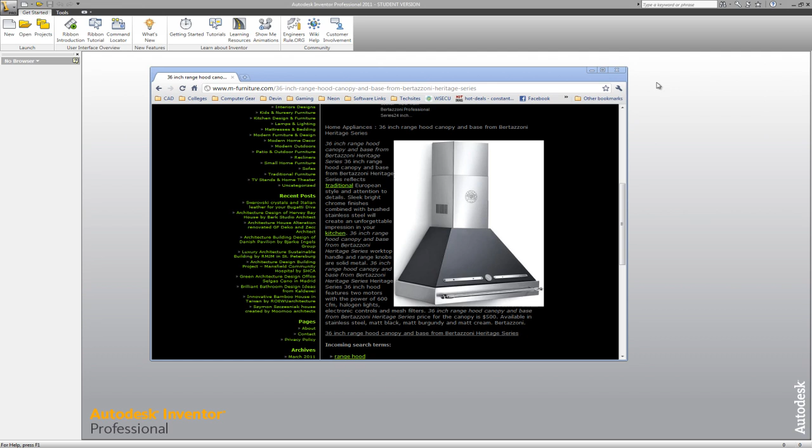I'm just going to wing it, but I'm going to go through all the steps, and I want you to follow along. If you choose to create one of your own style and dimension, it doesn't have to look exactly like mine at all. It can be your own design. I'll give you extra credit for it.

So I'm going to go to New, to English, to Sheet Metal, and OK. And then we are in our standard sketch mode right here.

First thing I'm going to do is go up to the tab for sheet metal. Our very first thing we do is we want to set our defaults. So I'm going to go here to the edit icon and click that open, and the very first thing is go New.

I am going to go 12 gauge stainless steel, and OK, and I'm going to double click on that to make sure that that's my default.

Now that becomes my default, and I'm going to scroll down and find stainless steel. There's some stainless steel 440C down here. I'm going to leave my thickness at 0.120, which is 12 gauge.

I believe I'm going to go up to bend while I'm right here without having to come back and do this. I'm going to go to bend, into bend relief, and I'm going to go to round. Click on sheet again, go over to K factor here, and click on the edit.

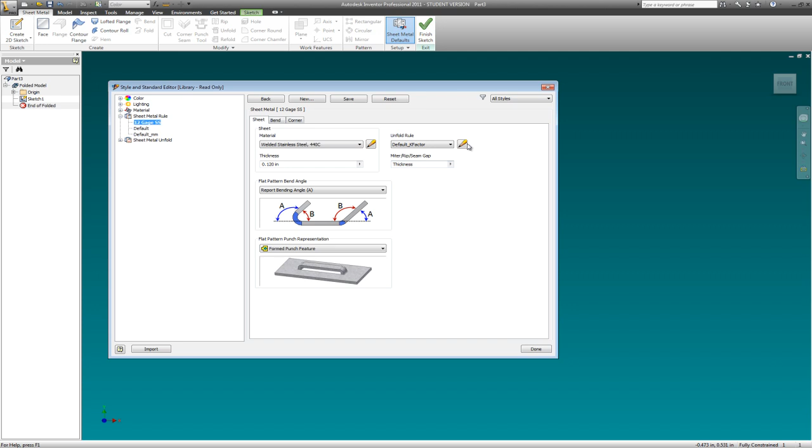It says, do you want to save the edits to the 12 gauge stainless steel? And I'm going to go yes.

I'm going to go to new, and I'm going to go V-bend gauge. I'll make it — I know I'm spelling gauge wrong, but I like spelling it this way — gauge stainless steel, with capital S's for stainless steel. OK, and go OK. Again, I'm going to double click on that to make sure that's the one I'm changing, and I'm just going to leave everything here as is, and then go to done.

So we look at this. Our sheet metal rule says that we've got stainless steel, 12 gauge stainless steel. Down here we have V-bend stainless steel, and off we go.

I'm going to use the thickness from the rule right there — actually, I'm going to uncheck the 'use thickness from rule' box, so that we're using the thickness of 120. And I'm going to apply. And we should be good.

So we are now ready to do some drawing. I'm in my front view. I hate this view, so first thing I'm going to do is it says finish sketch, okay, and then I'm going to right click and edit sketch, and there we are — we now have our sketch toolbar.

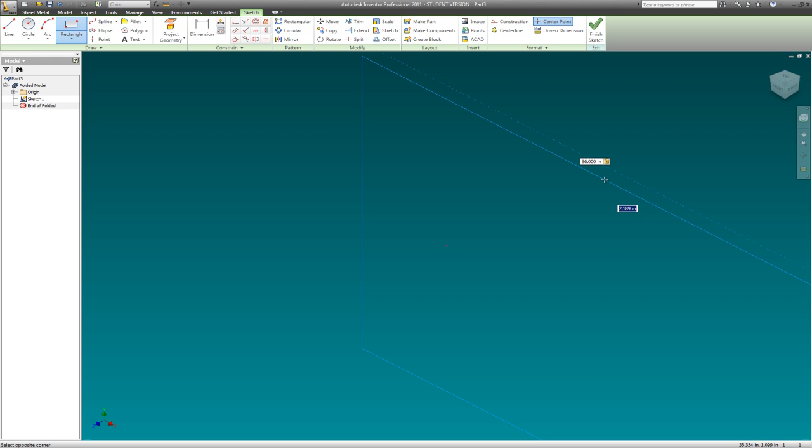I'm going to grab the rectangle over here, and I'm going to go 36 by 24, and there we have a rectangle that's 36 by 24.

I'm going to go to the front, and then pick this arrow so I make it nice and flat. I'm now going to go up to my house, right click, and go set as front. I'm going to go up to the upper right hand corner of the view cube, back to my house, right click and set current view as fit to view. So that's my home view from now on, and when I go to top, that's what I'm working in.

I think this is, for me, a holdover from working in AutoCAD and 3D, because that's where the homes are in AutoCAD, and for some reason they changed it over here. I just don't have my template set up right — I'm not quite sure what's working. But this is going to be real quick.

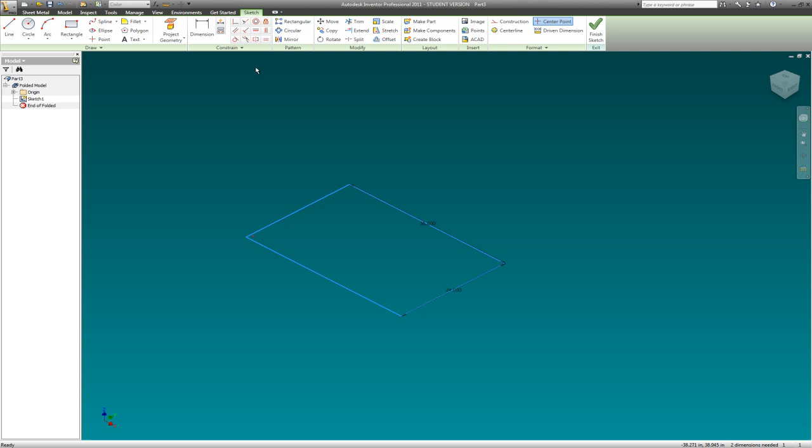So here we go. First thing we're going to do is go up to chamfer. I'm going to put in 8 inches, and I'm going to come over here and chamfer these two front edges just like that, and go OK.

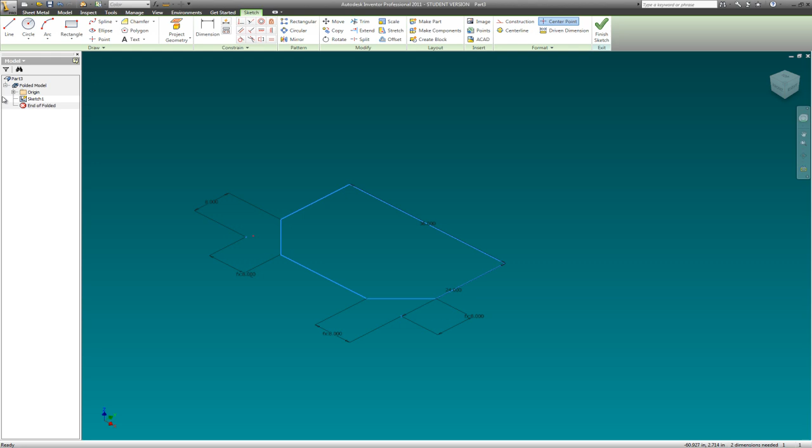I'm going to go over here to my origin and hit the plus sign on the origin and find the plane, which happens to be the XY plane that I'm working in. I'm going to right click that plane, go to Visible, and turn on the plane. Then I'm going to go Finish Sketch.

Now in Work Features, I'm going to go to Plane, pick the existing plane, and then pick again with my left button and pull up. You can see there's a number there, and I'm going to go up 18. I'll hit the green check mark, and now I have a new plane there.

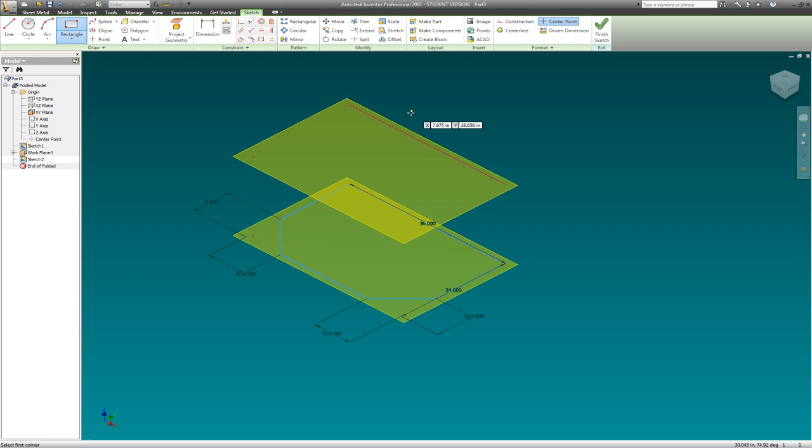I'm going to right click, New Sketch, and pick this plane to sketch on. Now I'll do my project geometry and drop a piece of geometry across the back here. Then go up to rectangle, attach it to that piece of geometry I projected, come over here, and go 18 tab 12. There we go, so I got a little 18 by 12 rectangle on top of my rectangle with the chamfered corners.

Then I'm going to center it. I happen to know that if I go to the end of this and make it 9, we should be centered, but I'll be a good guy and double check. I'll go right above View up here to my Measure Distance tool, pick the endpoint, and confirm that it is 9 and that I am centered.

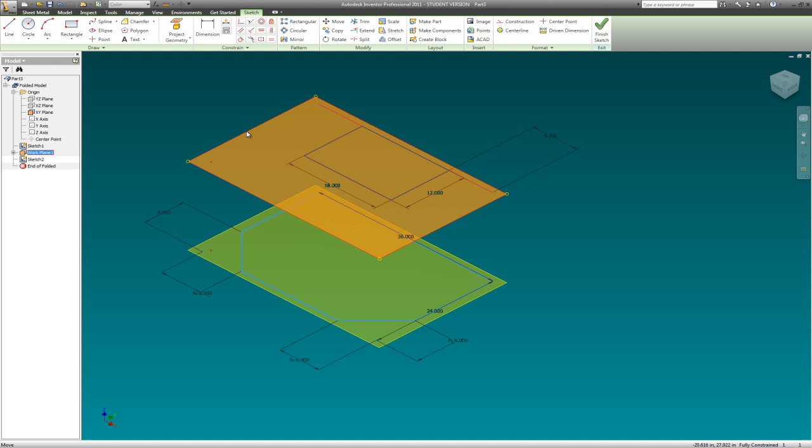I'm going to go to the work planes and turn their visibility off since it'll just be in the way and I don't need it right now. I'll need it a little later, but this is good. To show you, if I go into my orbit, you can see I have two pieces of geometry on two separate planes. Get back into Home.

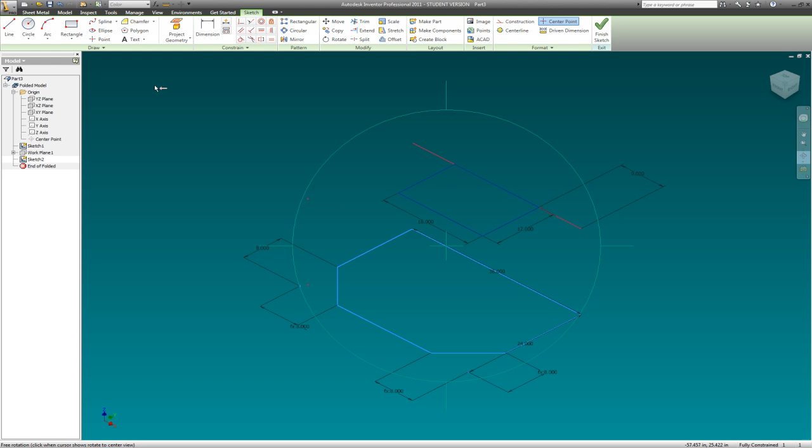Now I'm going to go Finish Sketch. We're in our sheet metal ribbon right now, so we're going to go to Lofted Flange. I'm going to pick this, and pick this, and we have just created our first lofted piece of sheet metal. I'm going to go OK.

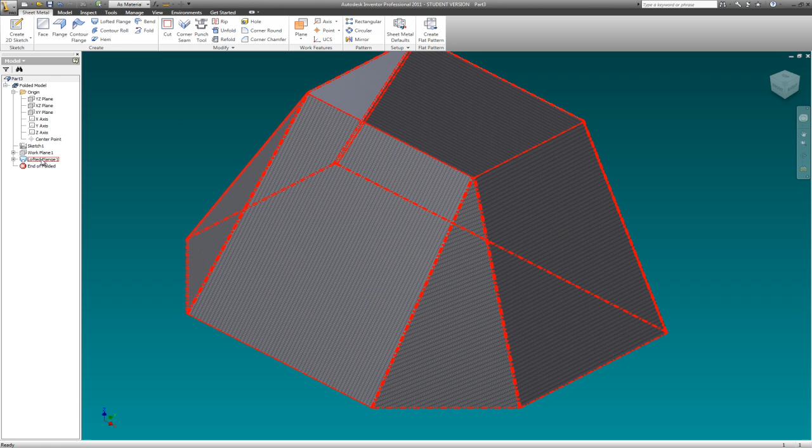And there we go. Oh, look at the nice texture with the little weld marks on the stainless steel. That's pretty spiffy. Okay, now one of the things in Lofted, I'm going to go back into my browser and right click on the Lofted feature and edit it.

One of the things we want to check is this converge box. Look what happens to the corners here. I'm going to uncheck that, then zoom in here so you can see it really well. When I click that converge box, look what happens: where the material would converge in the corners, it automatically cuts it out for us. That's an important thing for you to make sure and turn on. I'm going to go OK, and there we go.

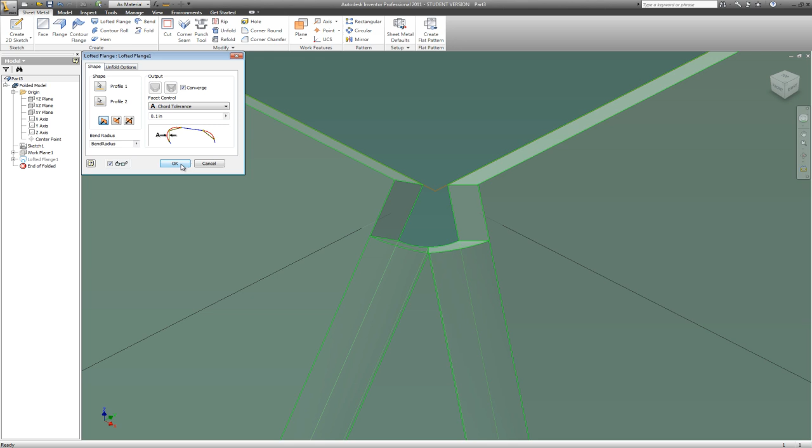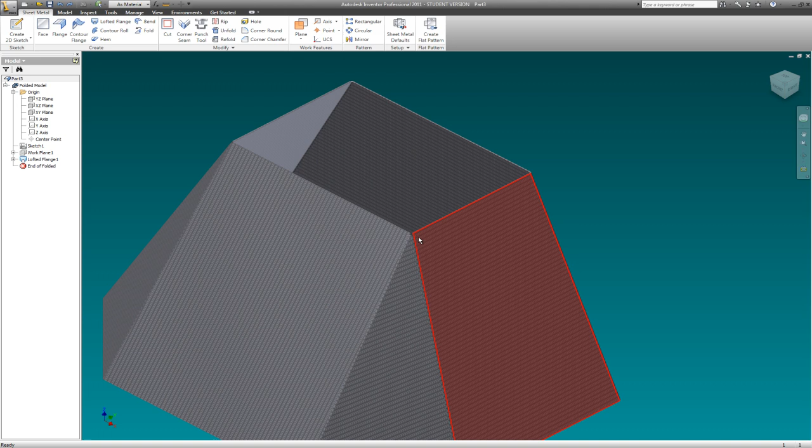Then, you know what, one of the things I'm going to do—I'm having misgivings right now, so I'm going to pause this for a second. I'm having some misgivings about this material. It's pretty cool looking with the welds, but I think it's going to be too busy for you to see some of the detail. So I'm going to go back up to sheet metal defaults.

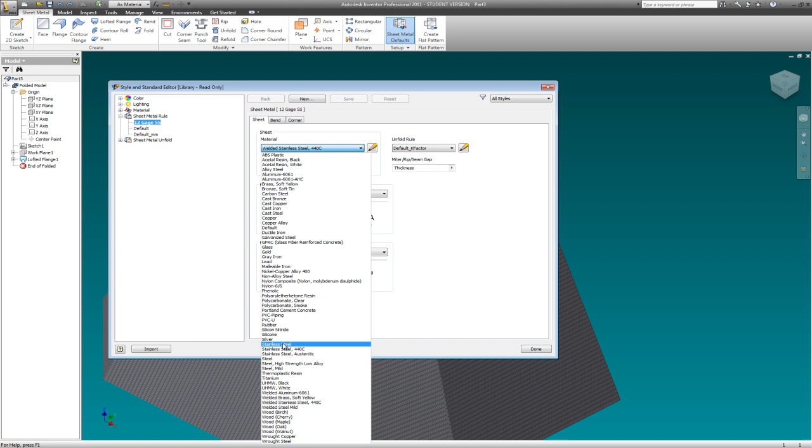I'm going to go back into the edit sheet metal rule and click on that. Where it says in the drop down materials menu, I'm just going to scroll down and find stainless steel, okay, without the welded look. I went too far when I was scrolling down, and I'm just going to pick the stainless steel 440C, okay, and then done, and save my edits, yes.

And I think that's a little easier for you to see the detail on. The welded stuff was pretty snazzy looking, but I think it's just going to be too much for us to deal with.

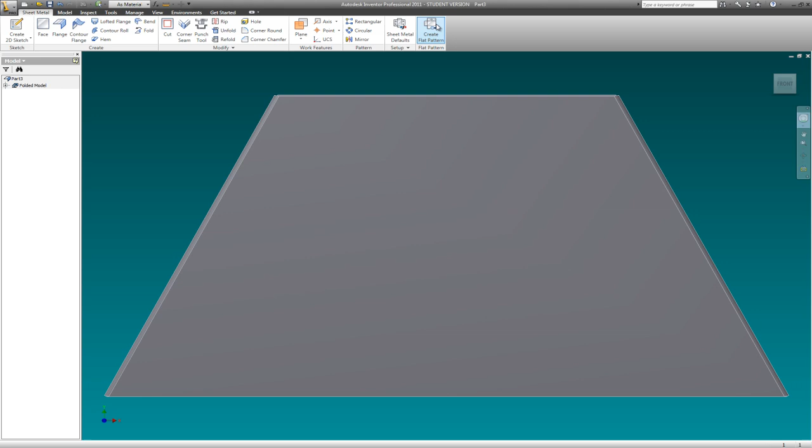Okay, so one of the things we do know about sheet metal is we want to be able to fold this out, and I don't believe we can right now. Nope, it's not going to do anything for us. So I'm going to go back into my home, but it did turn it around for me, which is kind of nice.

So what I'm going to do now is escape a couple times, right click, and we've got our flat pattern here. We've got to open this up. And what I want to do now is I'm going to have to undo here.

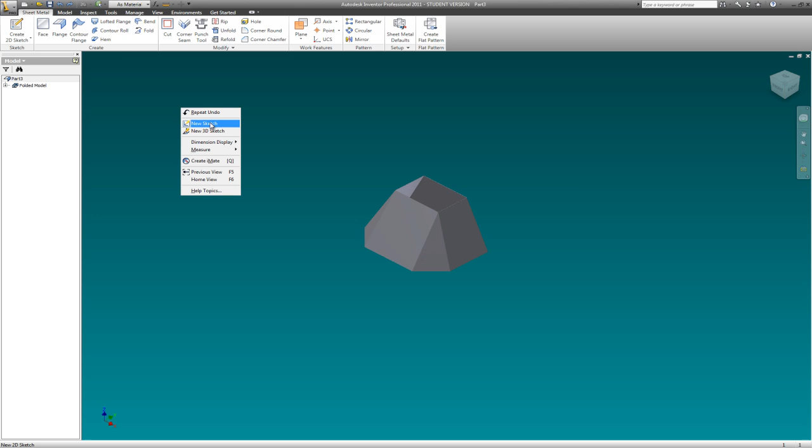There we go. Now I'm going to right click and go New Sketch, creating a new sketch on the back plane.

I'm going to go up here to my construction line first. Highlight that, come pick a line, find the midpoint on this piece of geometry here, then come down and find the midpoint down here.

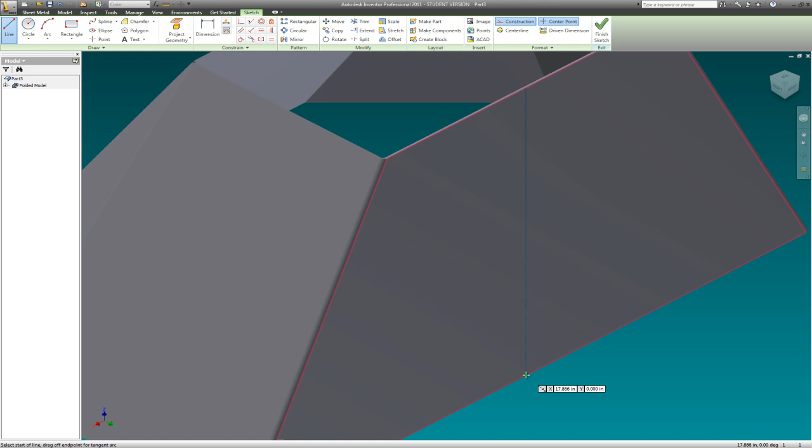Let's zoom in a little bit. There it is, okay, there it is. So now we have that midpoint right there.

I'm going to go finish sketch, and then we're going to go over here to a new tool called rip, and we're going to rip this thing. So I'm going to pick the face.

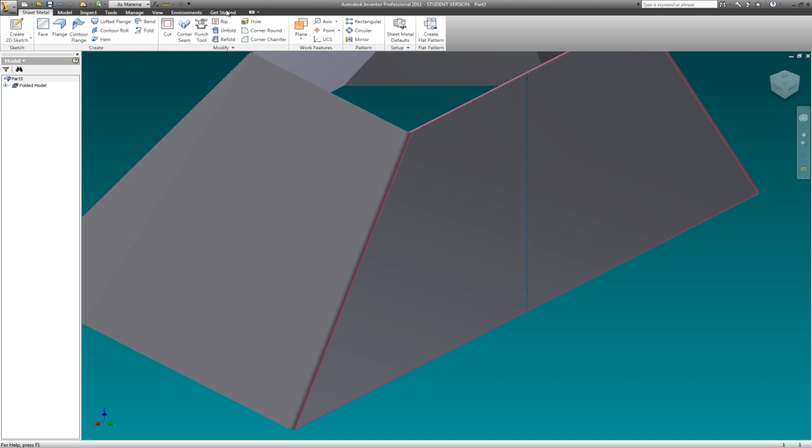Then I'm going to come over here, pick the rip point, come back over here and pick my line. Okay, rip, pick, and rip point. I don't know what's going on here, so...

We're going to go rip again. Rip, pick the plane, and then notice you just have to come up and pick the point right here of the line that you created. You don't have to pick one. If you go up here, there's a 2-point option, a point-to-point option, that's if you wanted to do something diagonally.

I'll actually show you that here. Let's go point to point. So I'm going to come over here and pick that point right there, and I'm going to pick this point up here, and there's my rip line diagonally.

I set my gap, I'm going to set it for 0.25, and I'm going to go apply, and you can see if I swing around here that I was able to rip it on an angle.

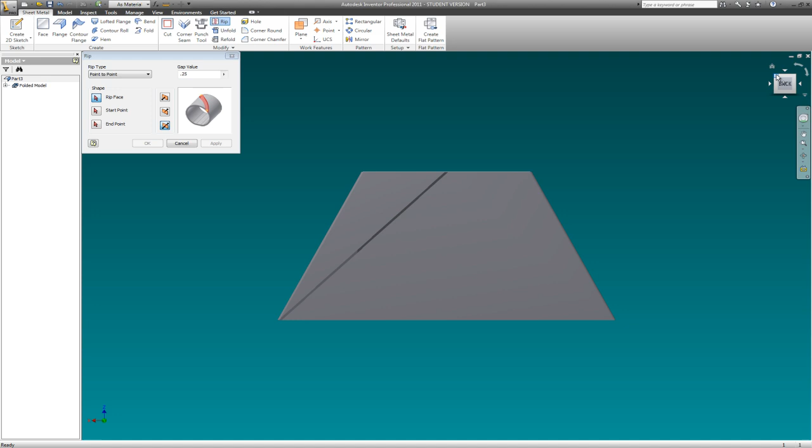But I don't want to do that, so I'm just going to go back here and undo my rip, close this out, open up my browser, go to my rip, right click on it, and go edit feature.

I'm going to go to single point, and then since I got my face, I'm going to come over here and pick my face, which is that, and then my rip point, I'm going to pick this rip point right straight up here, and notice it went straight down. I kept my value gap of a 1/4 inch, and I'm going to go OK.

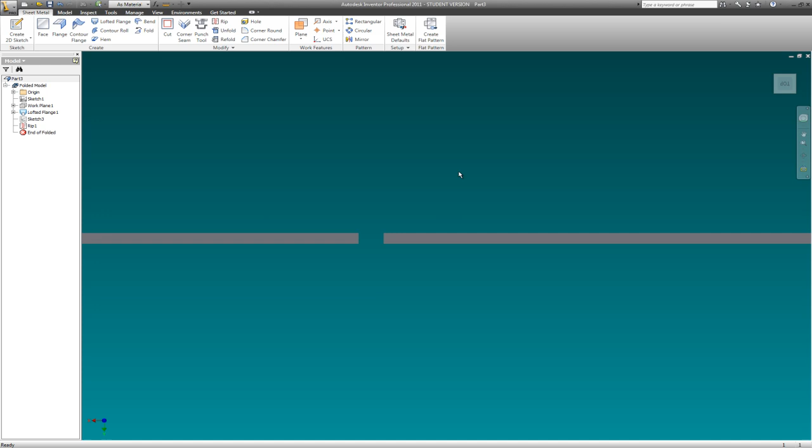If we look on top, you can see there is a gap right there of a 1/4 inch between my two panels. Now go back to home, come back around here, and then we're going to start a new tool.

We're going to use the flange tool. I'm going to pick the flange tool and come over here and pick this edge. Notice it highlights that it's 1 inch, okay, and it's 90 degrees.

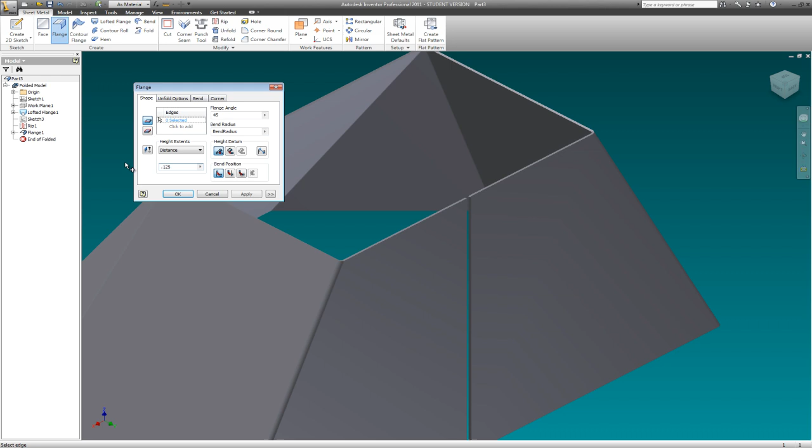Well, first of all, I'm going to make this 45, and then I'm going to make this about 0.125. Let's see how that looks. And I'm going to come on top and look on it.

This is one of the things you want to do while you have this available, is you want to keep working at it. So I'm going to go to my flange right here and close this. I'm going to right click on my flange and go to edit feature, and notice how it highlights it. So now I can change things.

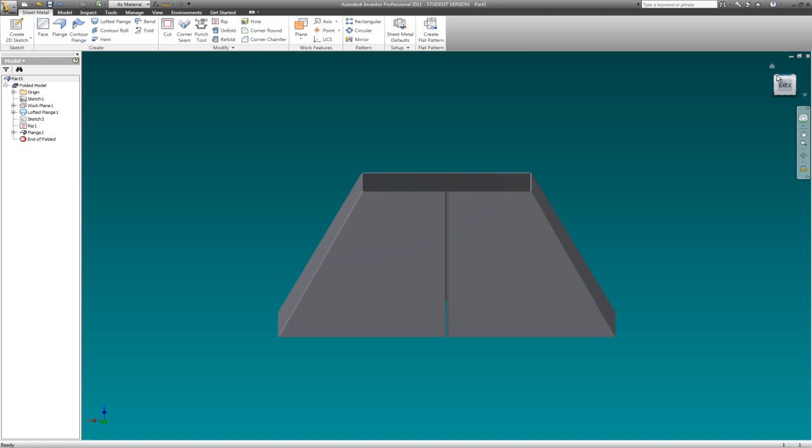I can go 0.25 and it made it longer, and that's what I wanted to do. I wanted to just make it a little bit longer, and you can use that function to edit and check things out.

So then I'm going to come around here again. I'm going to use the same flange tool, and I'm going to pick this edge right here, and you can pick either one, it doesn't matter. I'm going to go on top, and again this way it allows me to see what I'm doing.

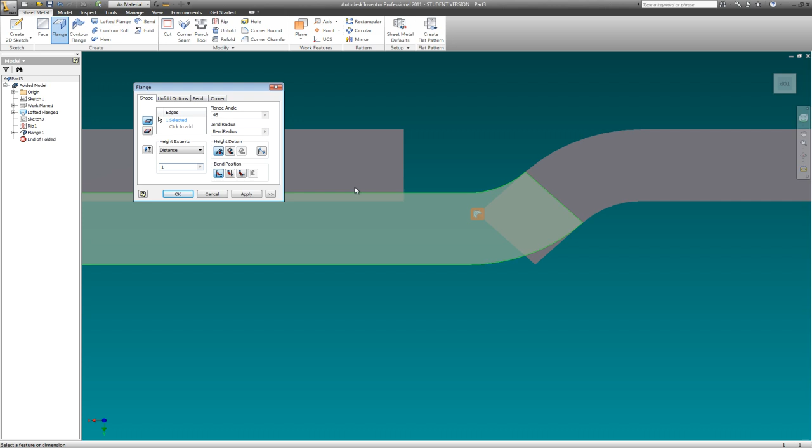Now I can tell you immediately that I'm going to make this 1 inch long, and I'm going to get a collision in here. It's going to tell me that I have a collision. I'm going to go apply, and there it is.

But I'm going to accept it because I have the opportunity to go back and fix the first one. So I'm just going to go to the first flange and go to edit feature, and I'm going to increase my distance to 0.3 and see how that's too much.

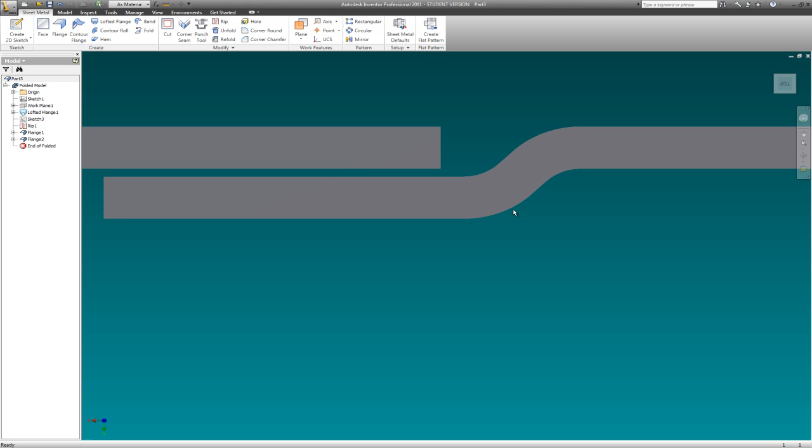Okay, so I'm going to go into the first one and edit my feature, and let's go 0.25 and see how that looks. That's pretty darn good. That is a standard offset of 0.25, so I think I'm going to leave that right there.

That was done by flange and flange. You can go into the first flange, edit the feature, and you can see that I did 45 degrees at a distance of 0.25. Then I went into the second flange and I'm going to edit that feature so you can see it. I again did 45, but I made it go the other way, and I went a distance of 1 inch. I'm going to go OK.

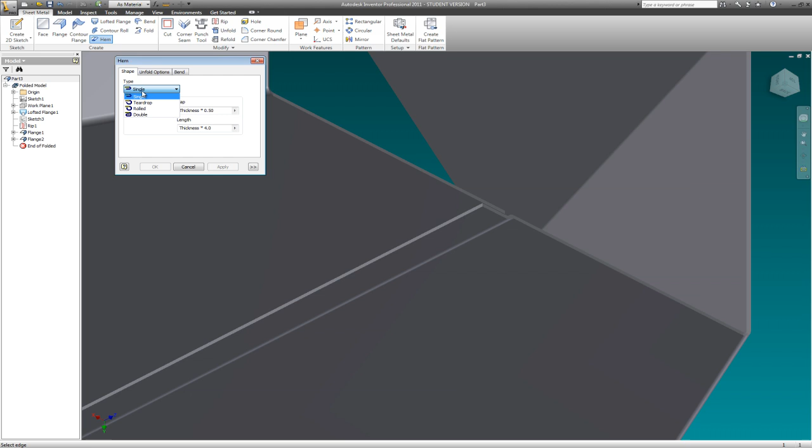Now I'm going to go into hem, and there's several different kinds of hems. There's a single, a teardrop, a rolled, and a double. In this case, I'm just going to use a single, and I'm going to come over here and put it on this corner here, and I'm going to come back. As you can see, I'm on the wrong one, excuse me.

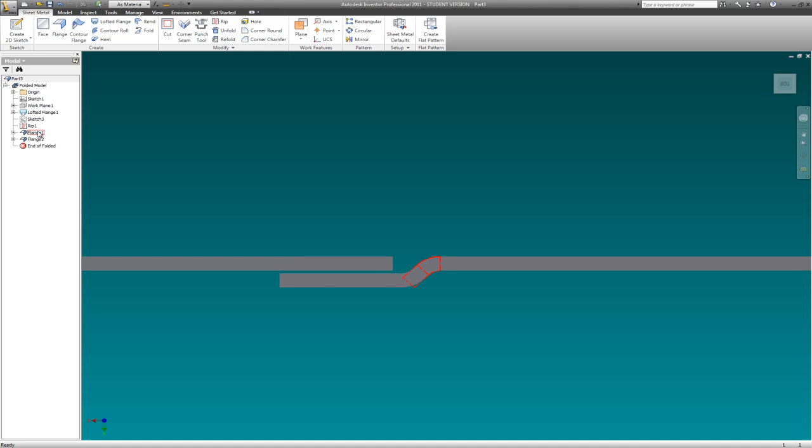I just need to go back into here, and I know I need to change something because I go to this very first one of my flanges, and I'm going to go to edit feature, and I'm going to go 0.375, and let's see how that looks.

I'm going to take my measure tool, and I'm going to go from this here to that face there, and that's 0.11, and that's not enough. I need at least 0.125.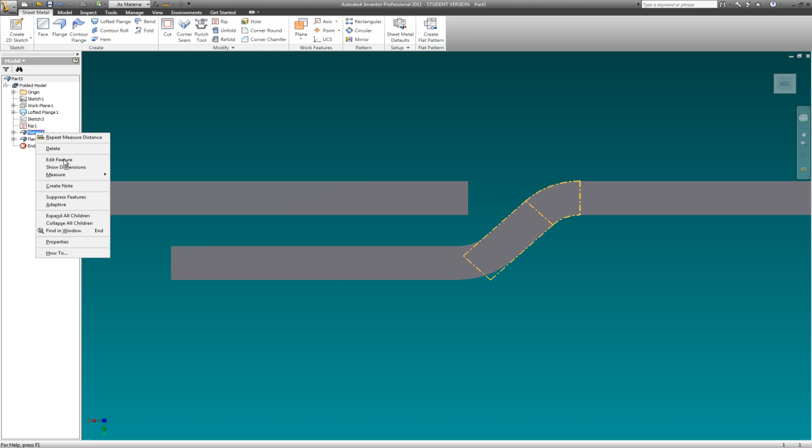So because I'm going to flange, I'm going to bring around this hem and bring this back around. I'm going to go in here, and this is - if you did this all the time, you would have these things figured out in a heartbeat. It wouldn't be an issue at all. But this is a great opportunity for you to play.

So I'm going to go 0.4. Let's see how that looks, and go OK. And I'm just sort of guessing as I go, and I just need it to be more distance in between here than the thickness of the material.

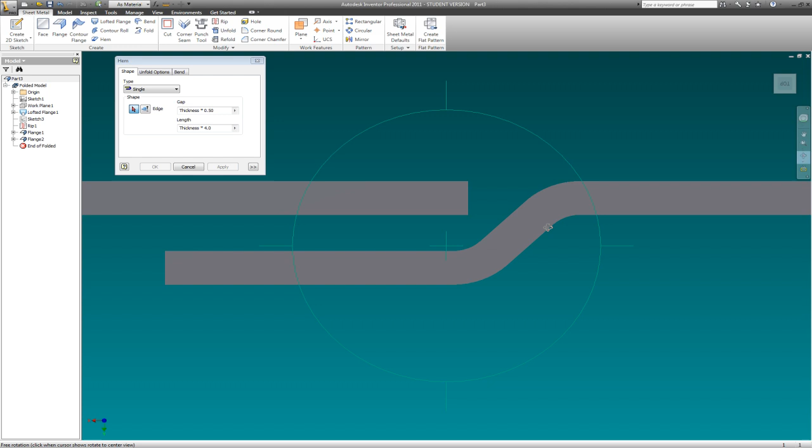Okay, now I'm going to go to my hem, and I'm going to come put it on this edge. Let's see if I can get my orbit to go just a little bit. There you go, just a little bit so I can grab that edge. Okay, escape, and come in here and pick that. And then let's go back on top and see how I'm doing here.

Oh, that's going to work. That's going to work. And I see I need to do a little more. So I've got a distance in here, I got a thickness, and I have a distance. So let's see which one wants to.

Let's go here, let's try 8 on this. That's my length. Okay, so that's going to be okay, I think. And let's go with my thickness here, and I'm going to go to 1 and see how that works. I like that. I'm going to go actually 1.1.

I'm going to take that and go OK, and we're going to get a conflict again. So just be prepared. Great, and I'm going to accept it because it's telling us we have conflicts, but it allows us to work them out. And I'm going to close this out.

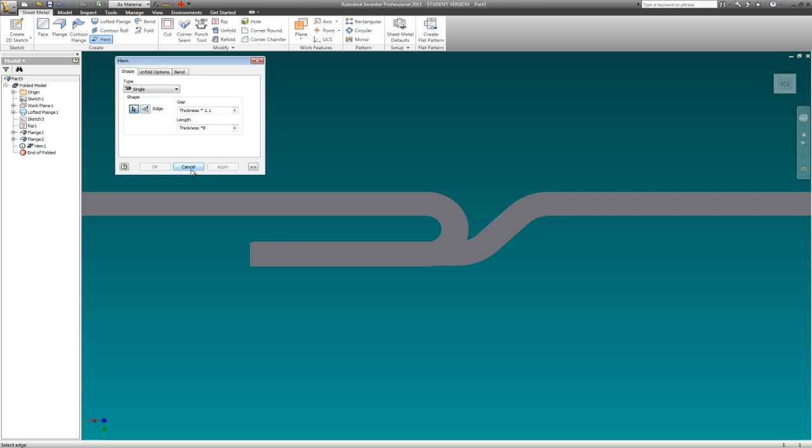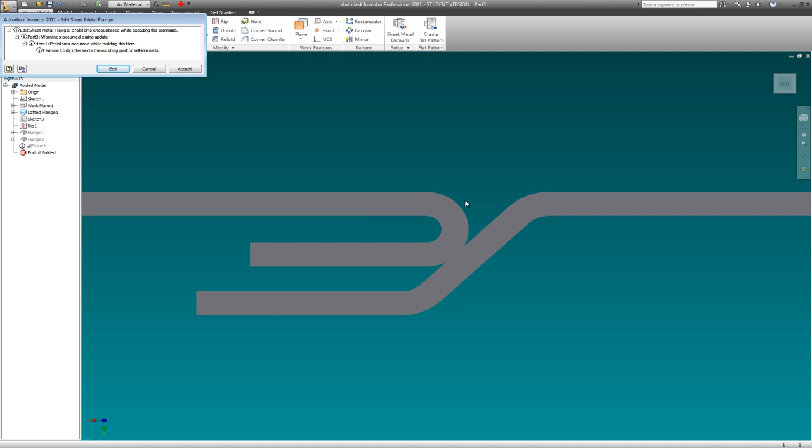Then I'm going to go back into my first flange, and I'm going to go in here and edit feature. And looks like I need to go maybe, let's try 0.75. I'm just guessing here, you guys. Okay, and that's too much, okay? And also I'm seeing that my gap in my rip is not going to be enough.

So I'm going to cancel that. I'm going to go back to my rip, and I'm going to edit the feature, and I'm going to change my gap to 0.375. And I'm going to accept that.

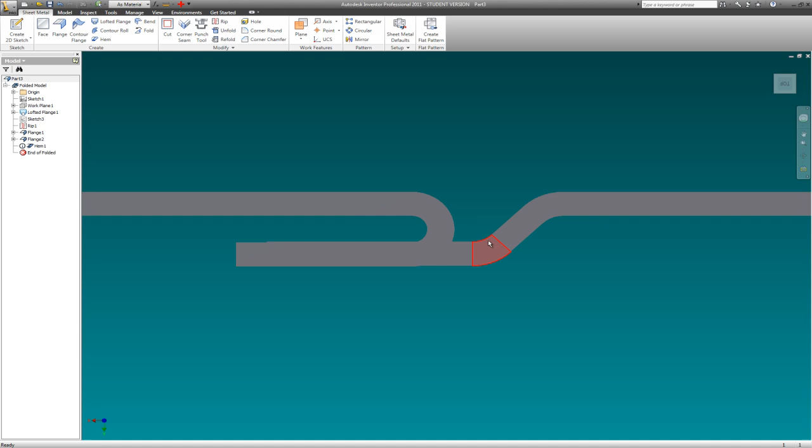Now I got to move this out, so that was that first flange, and I'm going to edit flange, and my distance is 0.8. Let's see how that looks. Too much. First flange, and...

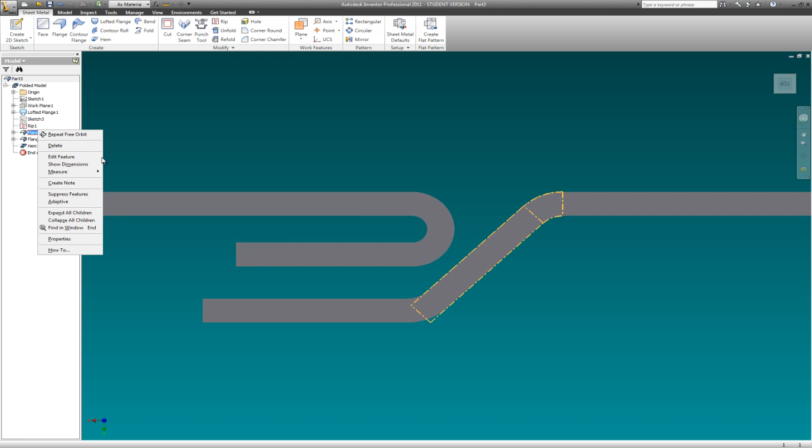Edit feature, and how about 0.6? Oh, there we go. Now we're cooking with gas. I like that, okay, that looks really good. That looks great. That's exactly what I'm looking for.

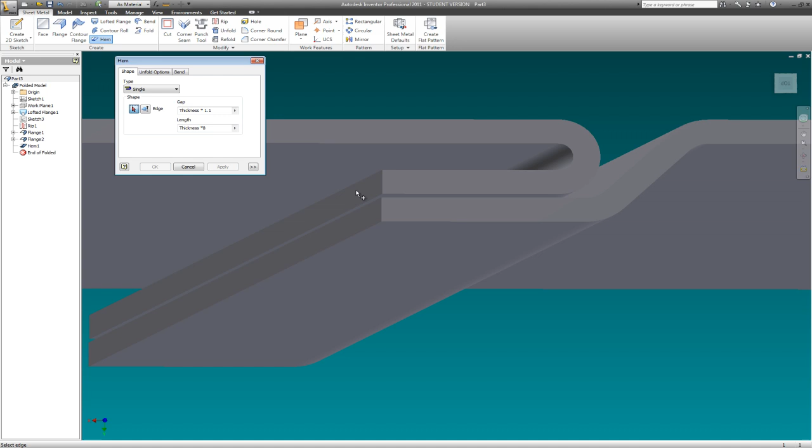Then we're going to go ahead here. I'm going to roll my view just a little bit because I need to put another hem on this. And put the hem right here. Okay, and I'm going to go back on top so that I can edit it and make it look right.

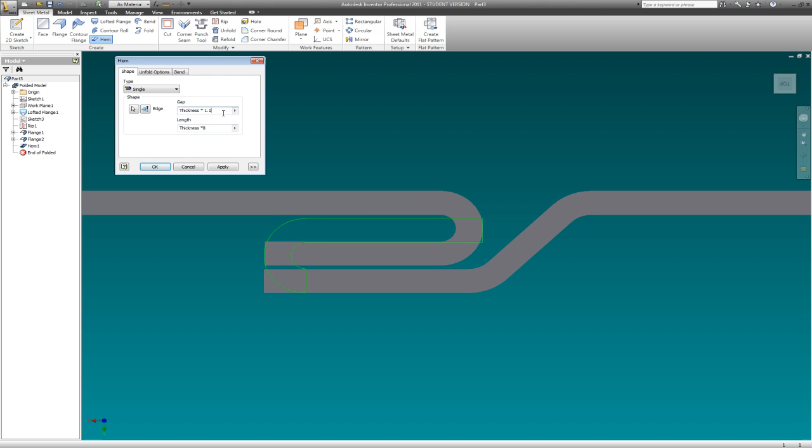What I'm seeing then is the thickness is - I need a little bit more thickness, so I'm going to go to 2. There we go, so that is clearing both sides of that. Okay, and it's a little bit too long.

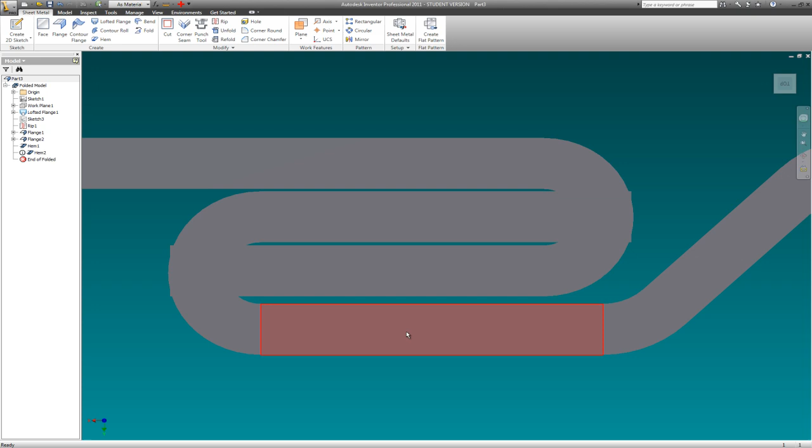So what I'm going to do is apply, and it's going to tell me I have a conflict. I'm going to accept it, and go back into this flange here, which is our second flange that we did. I'm going to edit the feature and increase the length to 1.25, and go OK. Great.

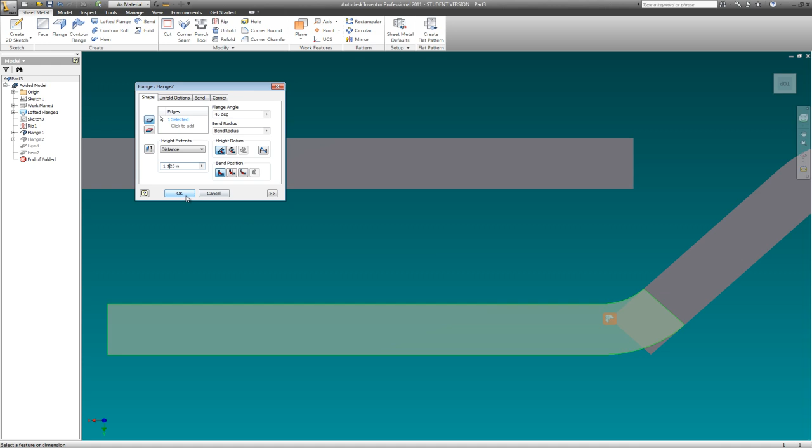I could probably change that to edit feature. Well, let's try 1.125, so 1 1/8. Yep, got a little bit of conflict. So I'm going to cancel that and keep the one that we had, because it's better to have a little extra than to make this all too tight.

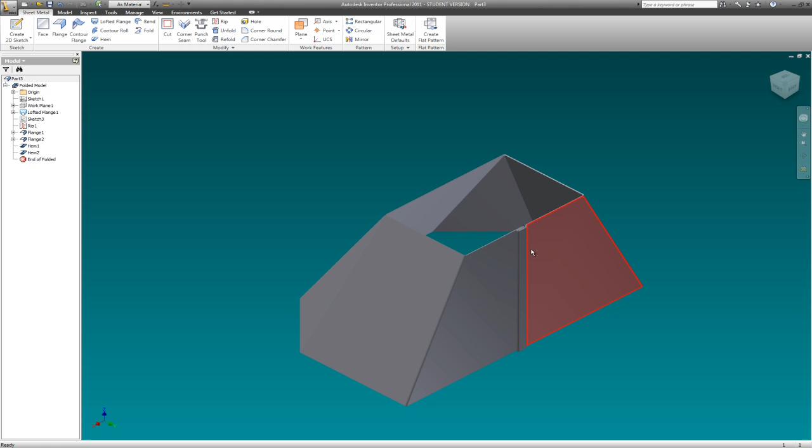But that all looks really good, and I do not have any conflicts. So now I have my object, and we are ready to do our magic unfolding. So there's our seam that you would create, and that would lock these two together. And I'm going to go create flat pattern, and there it is.

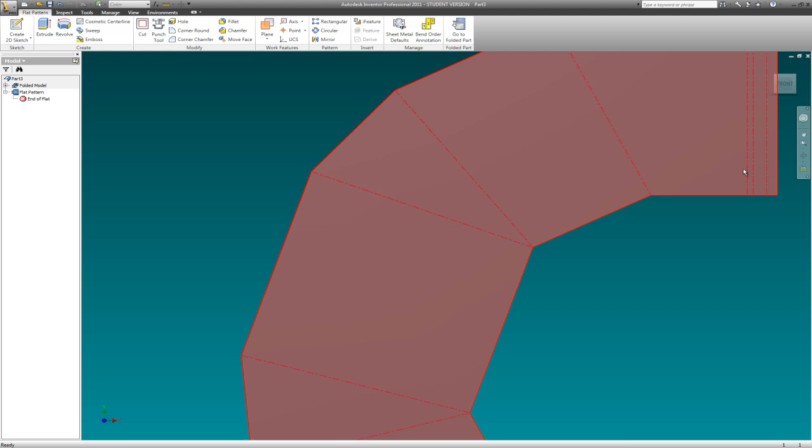And you can see all the little points that you would have marked out on your sheet metal. And I believe there's some corners that are actually, it's not showing them cut out when they're here, but it will a bit later. There we go. So that's the first part of this.

Now let's go down and work on this a little bit more on the inside here. So the first thing I'm going to do is come down here, and I want to do another hem on the front, because I want to strengthen this along here, and also make it so it wouldn't cut you if you raised up and hit it with your head. So I'm going to go up here, and I'm going to go to the double.

And I'm going to roll it onto here. I'm going to zoom in here and pick this inside corner. There we go, and we can see what it looks like. And I can change my thickness back to 0.1, I think. Let's take a look.

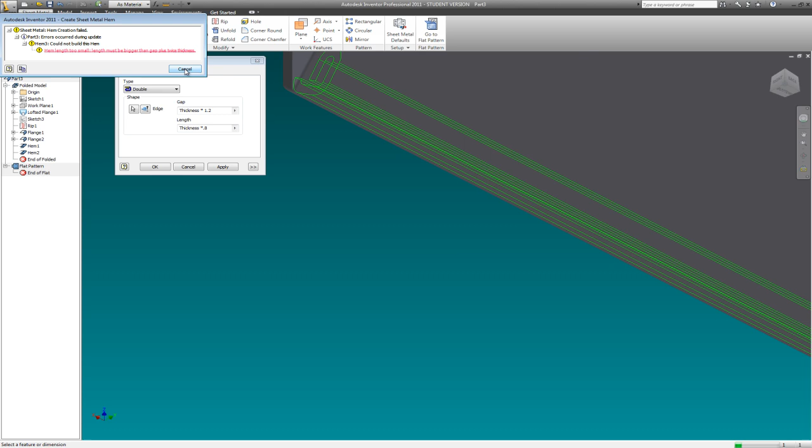And actually, I like the thickness. I like that. Let's go to 1. Apply. Oop, what did I do? Can't do that. Cancel. Okay, so let's go to, I think it was 0.8, wasn't it? Apply. Too small. Okay, I think it's just 8.

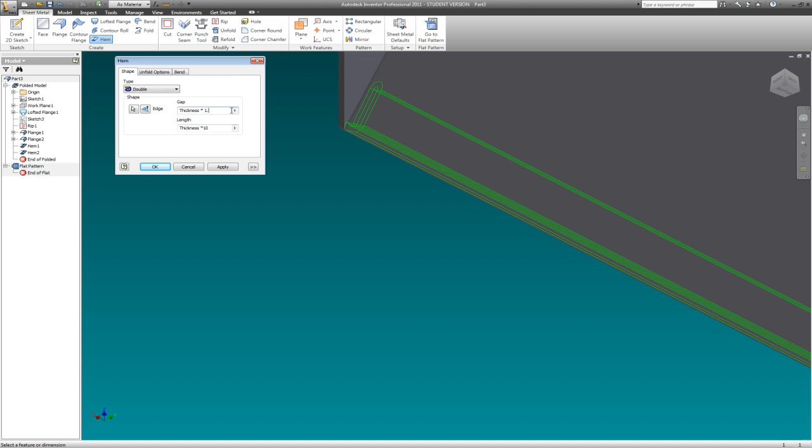There it is. And let's go to 10, which I believe looks pretty good. That looks good. And I'm going to go up, and my thickness, I can make this a little bit smaller. Okay. Apply. There you go. So it's a real tight bend that you see. Boom, boom. Okay. I don't think I can go any smaller.

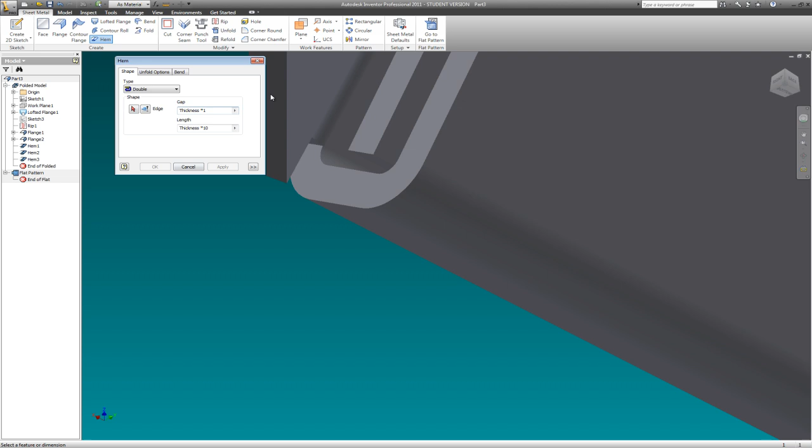Let's go 0.8 and see what happens. And I am just literally playing with this. Okay, and 0.8. And it won't let me do it, so I'm going to do a 1. And we're good. Okay, so there's my roll.

Now I'm going to come over here, and I'm looking at that, and that's probably too much of a roll. So I'm going to go in here and jump into this hem right here, and go edit that feature. And we got a double roll, and I'm going to take that 10 and make it 8.

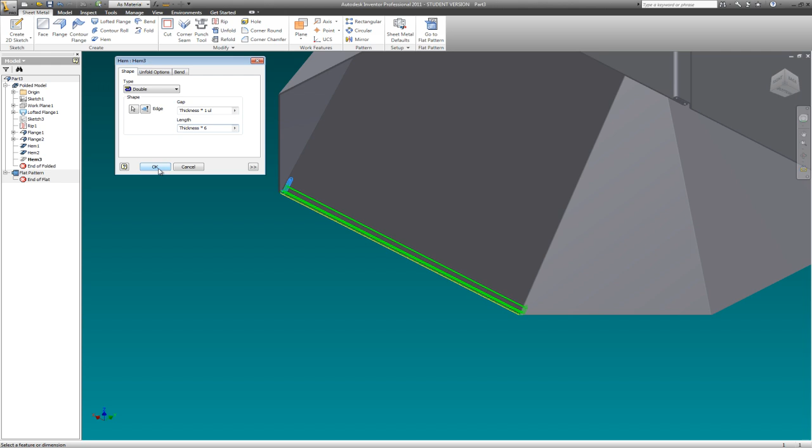How about 7? How about 5? How about 6? And again, I'm just literally playing to see how everything works. I want to understand how this software, how changing the parameters changes the actual software. And that's what's beautiful about this, is it gives you a preview.

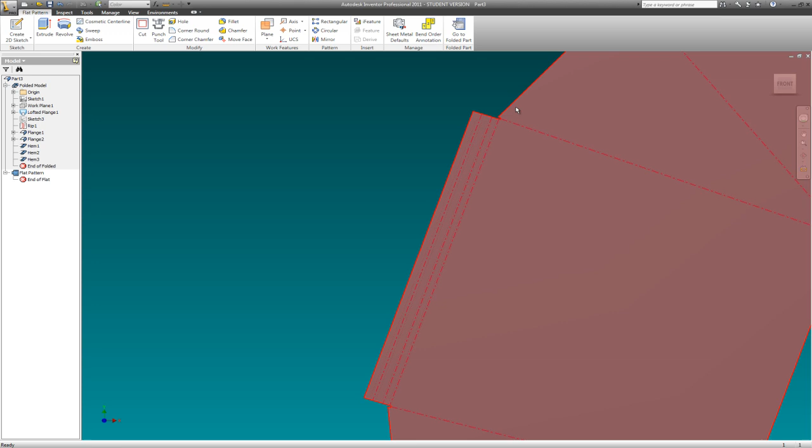Okay, so we got the front piece done there, and I'm going to bring this around here, and just for fun, we'll open it up, and there's that little portion that we put on it. And notice the little notch it put in it, because it knew it was going to roll it up, so that's an important thing.

And now we're going to come around here, and I'm going to get in here, and I want to do the same thing. So I'm going to go to my hem, go back to my double, and I believe, wasn't that 5 that I did? Or 6. That was 6.

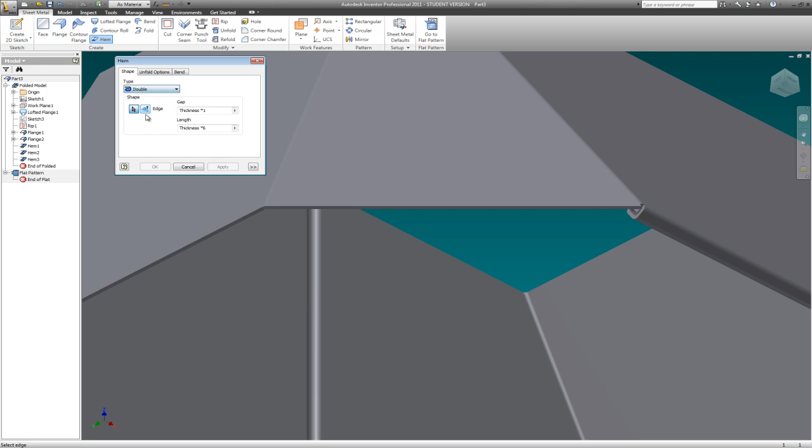Okay, and pick that arrow right there, and wrong side, so cancel, and hem, and double, and pick that inside edge, and go apply. It's going to tell me we have a conflict. And I'm going to go OK. And what I want to do is while I'm here, I want to see what the conflict is. So I'm going to cancel that, and I'm going to go.

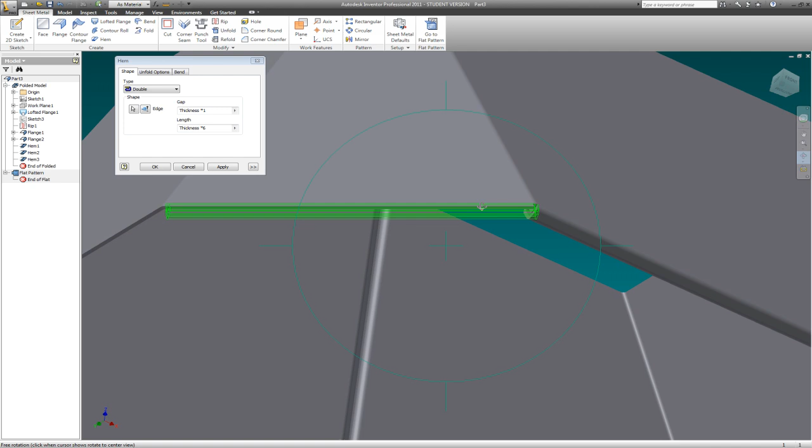It has it previewed. It allows us to continue the preview, and this is so we can get in here and see what our conflict is. And here you can see that our conflict is that we're going to wind up hitting this other piece of material that we've got bent in here.

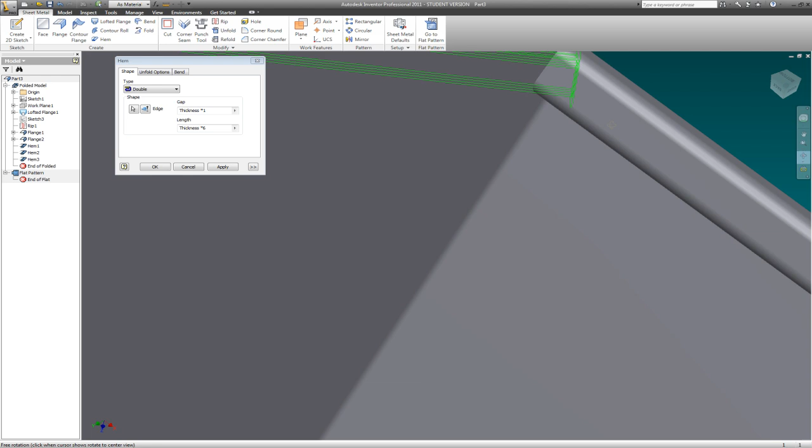Oh, come on, there it is. So we've got to do a little work here to fix that, because as you roll it up, it needs to have some clearance on it.

I'm just looking at that, and I'm going to look at this right down here. Looks like the only thing I can do is the one I'm working on, I can't do this one. If I hit apply, I'll get a conflict, the kind that will not allow me to keep it. So I'm going to cancel and get out of it.

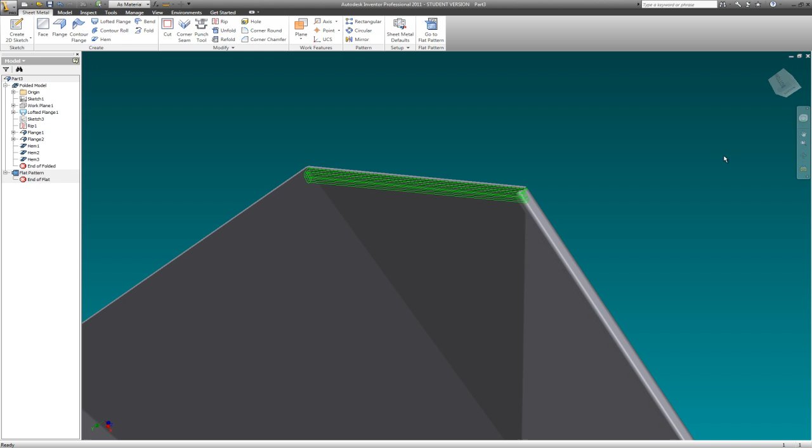And there we go. The first thing I'm going to do, which I haven't done yet, is go File, Save. Oh, hood with seams, oh cool. See, I did, and I was trying to figure out where I saved it. Shame on me. Okay, hood.

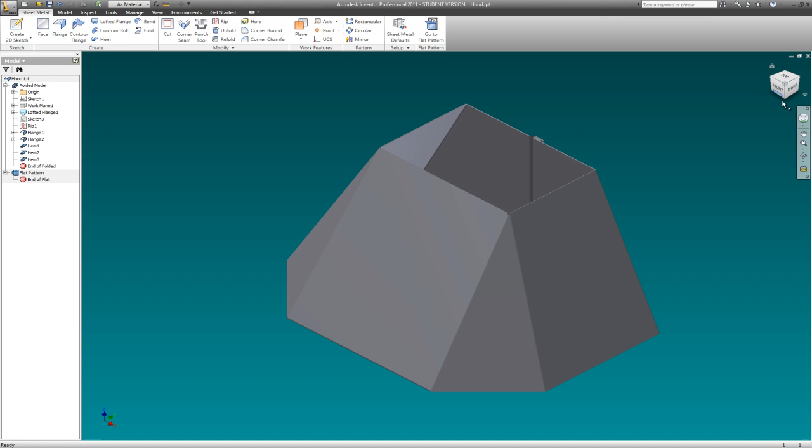Just in case I crash and lose it. Okay, we've now saved that. Good thing to do, and I've found that working in the sheet metal software has a tendency to crash. Okay, so we're going to zoom in here. I saw that I need to cut this corner off here, and this is about the last thing I'm going to be able to do on this video, so I'll do this as quickly as possible.

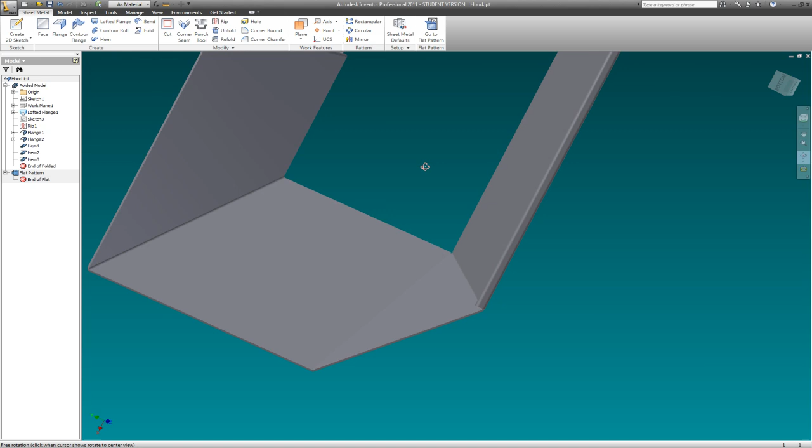This is an interesting little piece of a thing we can do here.

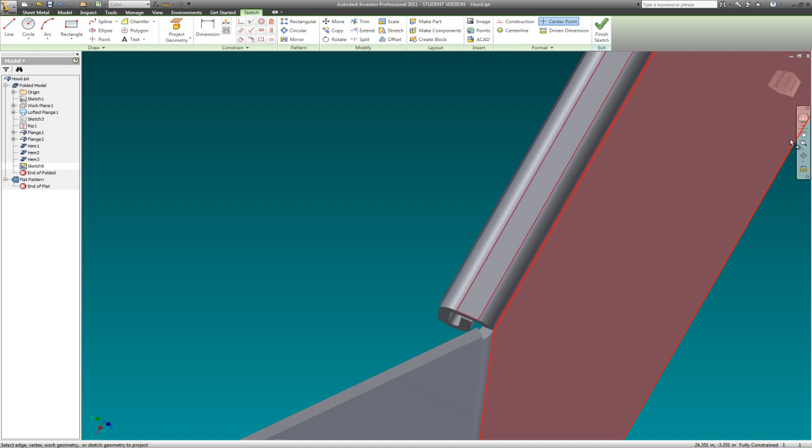I'm going to come in here and go New Sketch, and I'm going to pick this face right there. Then I'm going to go Project Geometry. I'm going to pick this outside line here, the end of this here, and that outside there. I'm going to use my Orbit tool to get in there, and you can see where my geometry is. Okay, don't crash. There we go.

And then I'm going to come up here and draw a line, going from that piece of geometry there to that piece of geometry there. And I'm going to go from there over to here. I think I'll just define it by an angle.

Looks like, how about we try 45? We can come back and fix it later, but I'm thinking 45 is going to be enough. And done, finish sketch.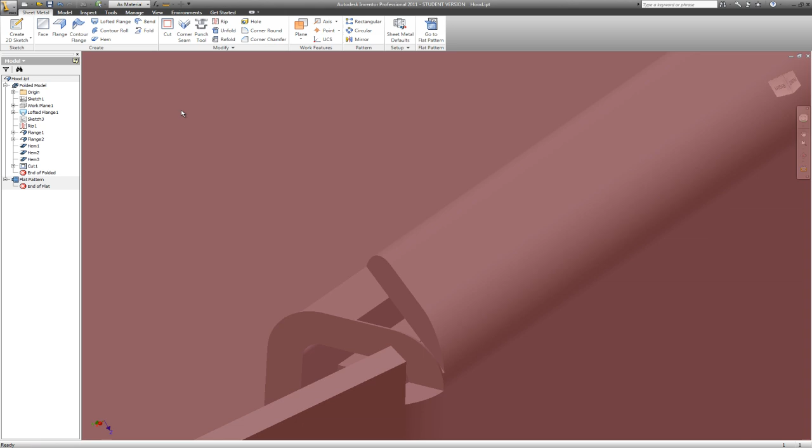Now we're going to go to the cut tool. We're going to pick this profile, go thickness and see what happens, and go OK. It just goes down through it, okay, which is not enough. So come on back out.

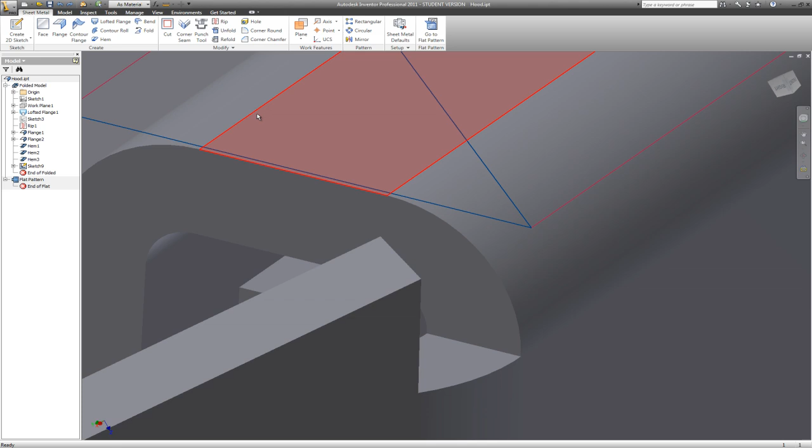And I'm going to undo. Do you notice that it didn't quite take the corner over here? So I'm going to have to increase this a little bit. I'm going to have to project some other geometry here, so I'll have to get out of here. It left a little edge on here.

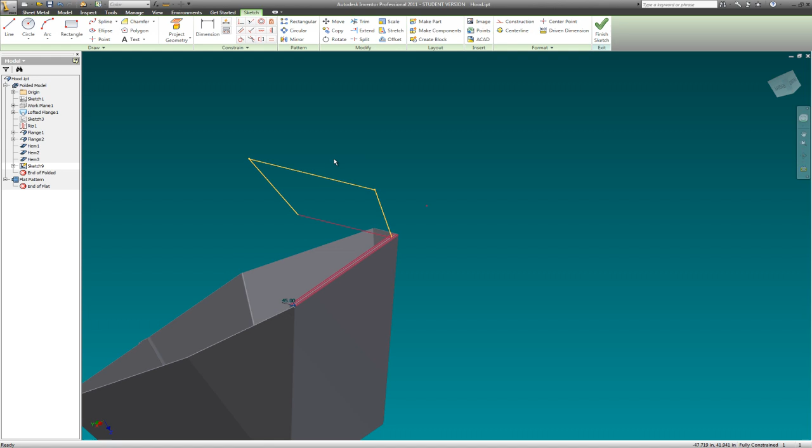And I'm going to have to zoom out here, get out here in the real world, and go back here to my sketch. I'm going to go Edit Sketch. And somehow I got some magic geometry out here which I don't need. Huh, I don't know where that came from.

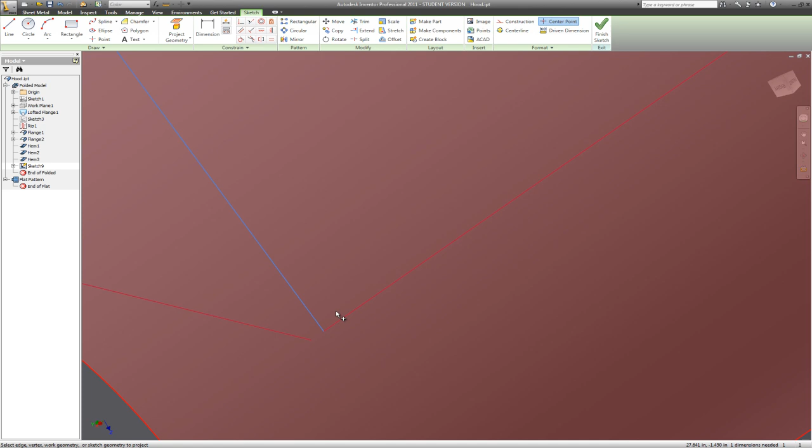But this is not over quite far enough, so I didn't do something right. So I'm going to delete that line, and project this piece of geometry here. I'm going to go down here and project this little corner right here. And now you can see what the problem is right there. It was just a little bit off.

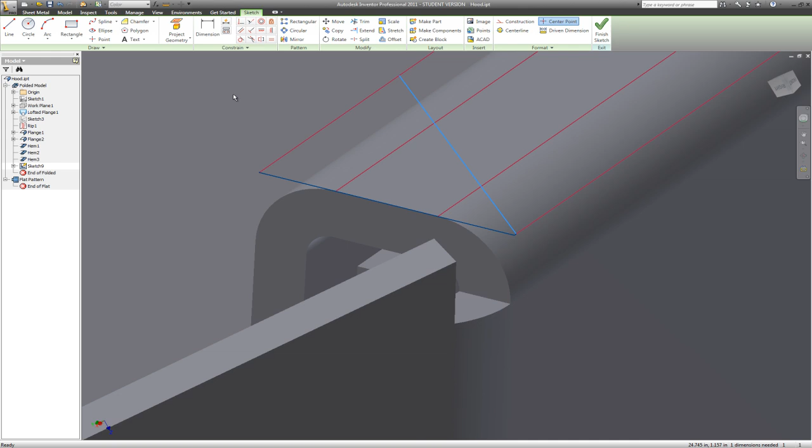Okay, so I'm going to go with my line, and I'm going to pick, and come over here and pick that line over there. Okay, there we go, and hopefully this is over far enough. I'm going to go Finish Sketch. Great, go to Cut. There's my cut.

Now here's the thing we can do. We can do this thing across the bend. Let's see what happens when we do that. Okay, and it did do it, but it didn't take out this other material that I need to take out. I'm going to go OK with that.

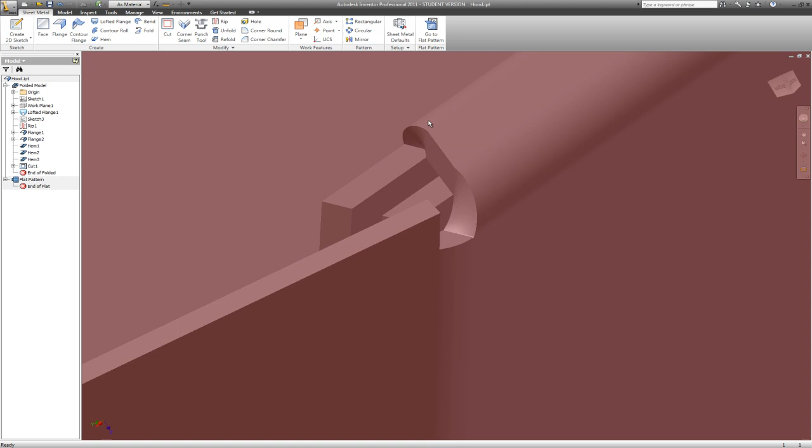Zoom out, and come back in here. Zoom in here and rotate myself around. You can see how fun this is, working inside stuff. Okay, so you can see what I was able to cut out there, and it cut it right out to that edge.

Now what I want to do is cut it all the way across. So I'm going to do that, but I'm going to call this good because this is the end of my video.